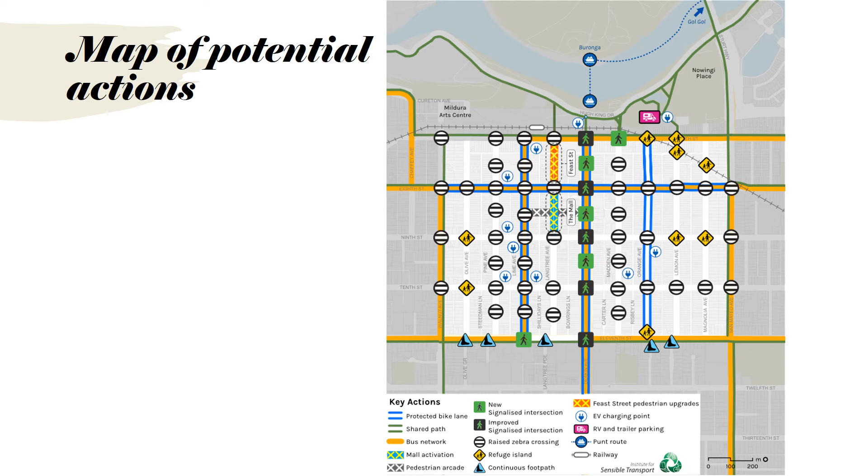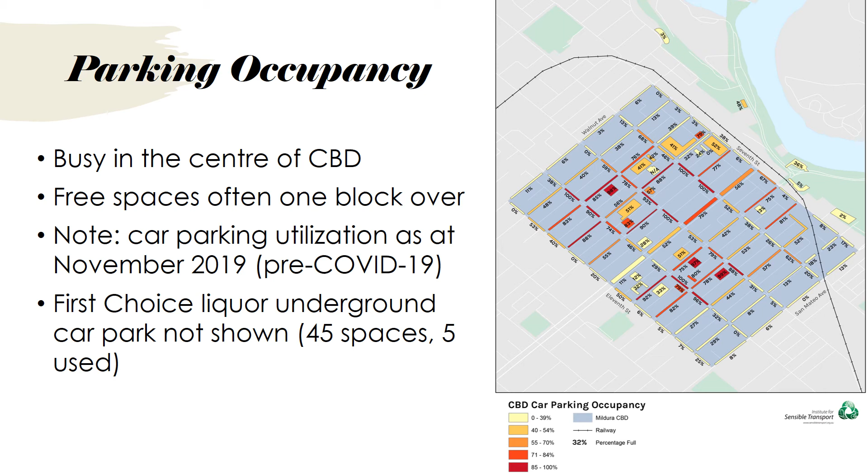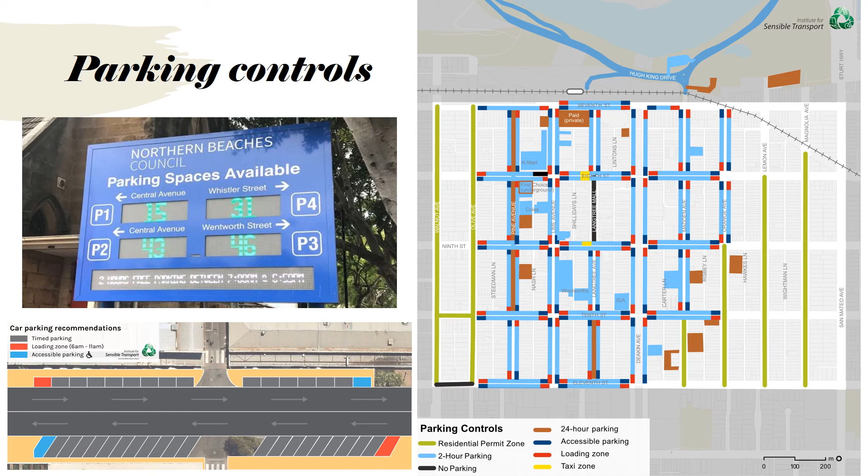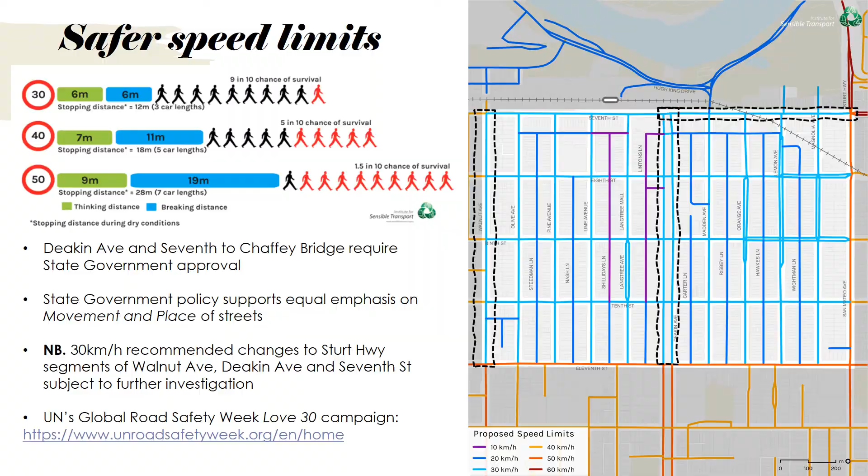Importantly, there's been a lot of misinformation about the merit or otherwise of 30 kilometres an hour. The good news is we not only have the United Nations on board, whose road safety theme for this week in April was specifically the Love 30 message, that the evidence was in that 30 kilometres an hour was the optimum speed for everyone to happily coexist. Perhaps it's embarrassing to admit the entire city of Auckland, a major capital city in New Zealand, has already introduced this speed limit for their CBD. So it's a little bit embarrassing that the Kiwis have already beaten us to it.

What we're trying to do is create maximum amenity, comfort and civility in the CBD as an inspirational, positive experience each and every time you come to the CBD.

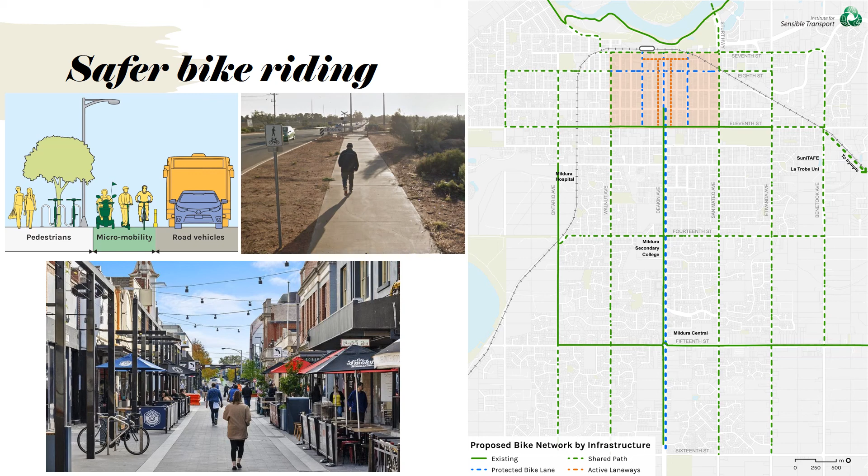This slide just briefly highlights the importance of approach routes to the CBD. Our strategy does not simply focus on the CBD, but also on how we can streamline and improve pedestrian and cycle access en route to the CBD from suburbs further afield. It's important to note that we already have some great infrastructure in terms of footpaths out there on 16th and 15th Street, but perhaps it's not so great in terms of amenity and shade trees. So there's much more work to do, and we aim to put it as a clear priority in this strategy.

We have a couple of ideas for you to consider about how we reallocate space on existing CBD streets. At present, we know that it's really not safe to have cyclists travelling along behind parked cars, potentially a disaster waiting to happen. Or, if it's not a disaster, it's perceived as definitely not safe, and so people leave their bikes at home and get in the car.

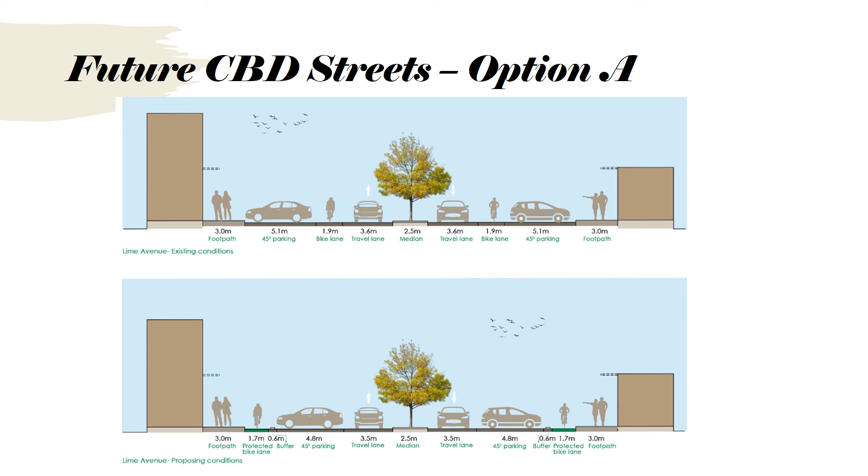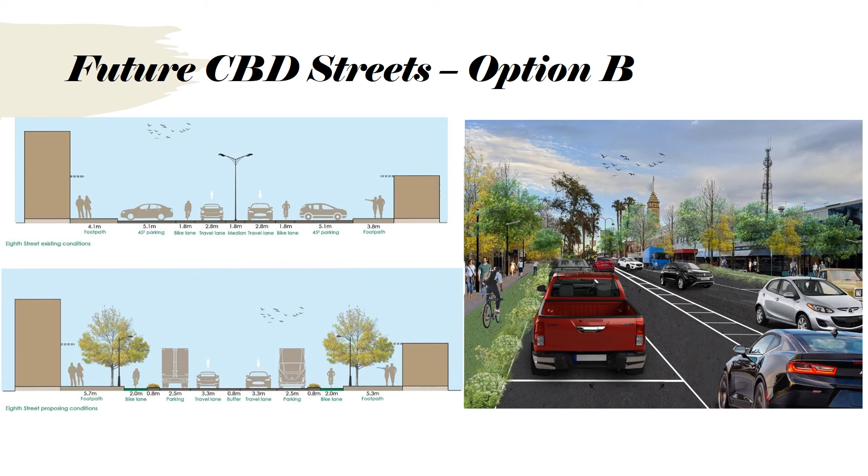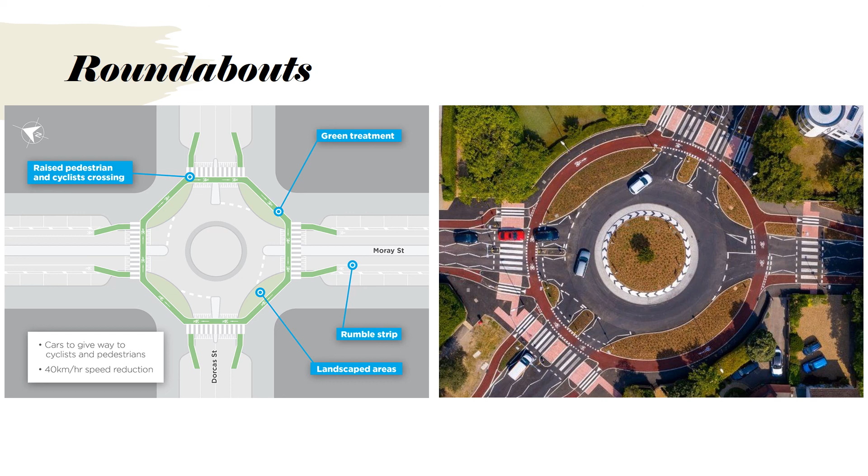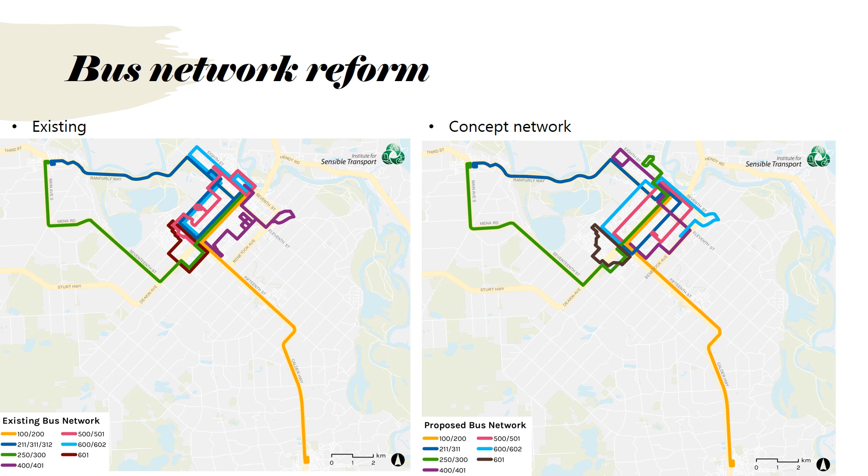Buses are certainly on the agenda. We won't say any more about that for now, but hopefully electric buses aren't too far down the track.

We've presented these ideas to a councillor briefing back in July. We were hoping to have this project out on exhibition before this, but we're now racing at the start of August. We're inviting your written submissions in response to the draft strategy, and we are now heading for potentially a September-October report to Council with a final strategy based on your feedback. Thank you very much.